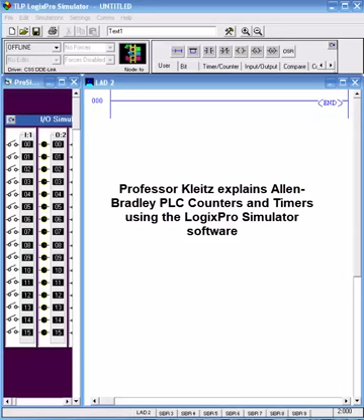Okay, let's talk about timers. I'll be running the simulator, not the actual RSLogix, but it'll give you the same effect. Under timer, we've got timer on, timer off, retentive timer, and so on. But you want to read about each one of these. The most basic would be the timer, the T-on.

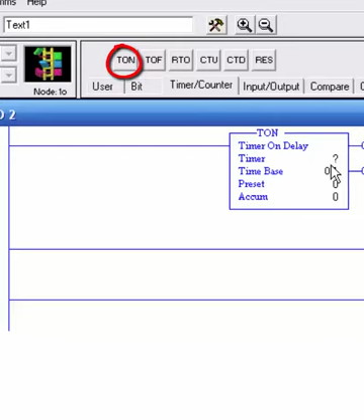So I'll add a few rungs here and grab the T-on, and I'll drop it here, which it always ends up appearing on the right hand side. Timers always start as T4, so I'll say T4:0. And then we pick a time base. This is going to be tenths of seconds. On the RSLogix, you have more choices: 1 second, tenths, hundredths, and thousandths, I think. Now the preset, let's just set this at, let's say 50. That'll be 50 tenths, which will be 5 seconds.

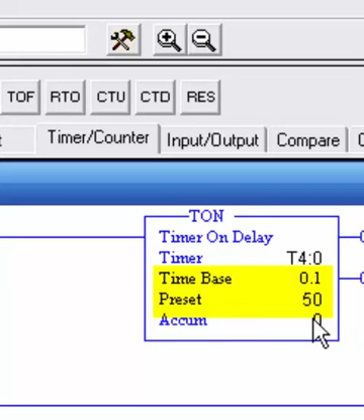And as this is timing, you'll see the accumulator counting up. And as soon as it hits 50, the done bit goes on. What we want to do is drag an XIC down here, and we'll use I:1/1, and this will be the timer enable. And when we throw this, this will enable the timer.

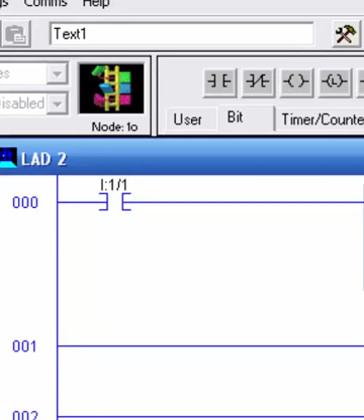As the timer is counting up in the accumulator, we may want to monitor several of the bits of the timer. So if you want to monitor a bit, you would just say T4:0 slash, let's look at the enable bit. And when this is activated, let's just turn on this output number 2 light.

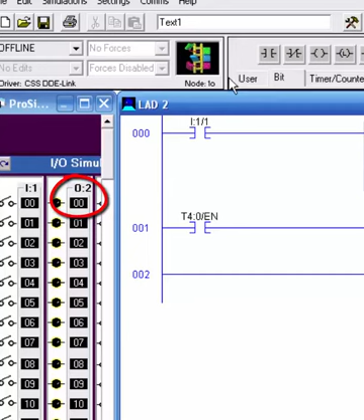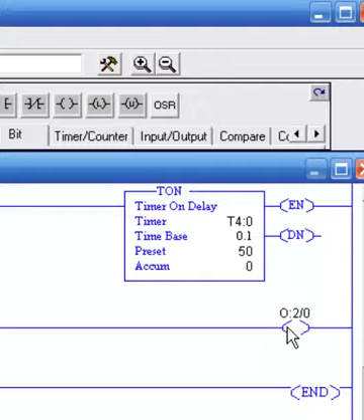So I'll grab an XI, or OTE, I mean. And of course, you're always going to put symbols and labels on these, but right now I'm just trying to get through this in a hurry. I'm sure you'll do what's right. Output colon... 2/0, and this will be the enable light, and that light will come on as long as this switch is closed and the timer is enabled.

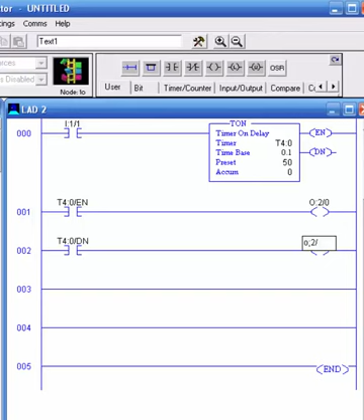So I'll add a few more rungs here, and you might want to monitor a few more lights. How about the done light? So you could do the same thing. Grab this down here, T4:0, T4:0 slash DN, and we can watch the done bit. And if I grab this and drop it down here, make this another one, output 2 slash 1. And let's just look at this much. I'll let you figure out the TT bit.

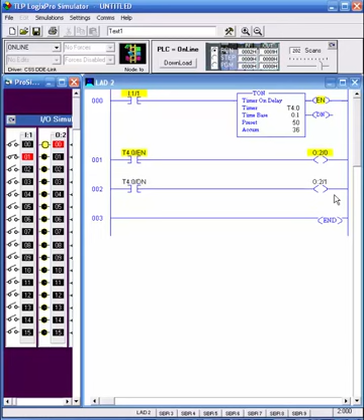And if I download this and run it, you'll get an idea on how this thing works. So when I close the switch, is this thing running? Oh, I closed the wrong switch. Let's open that, close this switch. It's enabled, the enable light's on. As soon as it's done, the done light will come on. And the done light came on.

So basically, this is what I want you to do, is to show me how the T-on, the T-off, and the T-retentive all work.

Okay, another timer application I want you to look at is an oscillator. You all know from digital logic, it's often required to have an oscillator that's at some given period or frequency. What I've got, this first timer, this is timer 1 and timer 0, but timer 1 is set up at, what's that, 10 seconds, and timer 0 is set up at 5 seconds. And to get this oscillator to start working, what we're going to do is oscillate back and forth between these timers. Now the first timer, T41, is driven by the done bit of T40.

And now when we first start out, this T40 is not done. And that's what I'm checking for. Are you not done? Well, it's not done. So this is true. This timer will start counting up to 100. As soon as it hits 100, this done bit comes on.

This done bit activates this XIO, or XIC. When this is executed, this one starts timing up. When this one counts up to 50, this done bit will be done. That's going to make this false, because here I'm saying, are you not done? When this is false, you may have discovered that the done bit, as soon as this goes false, the accumulator gets reset, the done bit shuts off. As soon as that done bit shuts off, that's going to make this false. That's going to turn this accumulator back to 0, shut this done bit off. When this done bit turns off, this will be true again, and the cycle repeats.

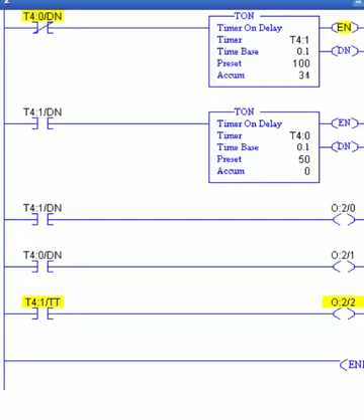So for one cycle, the length of time it took to go from here down to here and reset everybody, that's how long that was on. If you wanted to see that actually happening, you could go into step mode, time it just right, and single scan. Each time I press this once, this will count up - 3, 4, 5. I'd be here for quite a while, but you could shorten these up. Maybe I can get through this, but if I kept doing this, you could actually see this come on for one cycle. So tell me what that duty cycle is.

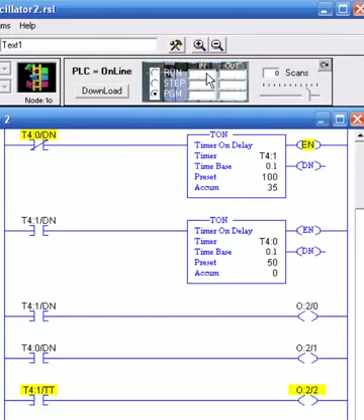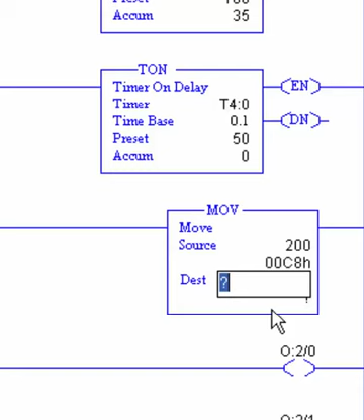Now another thing I'm going to ask you to do is speed control on this. You could actually load a different number into the preset. If I go into program mode and add a new rung down here, I could use a move statement, which is over here, and move some data into the preset. So the source would be some number - instead of saying 50, let's say I want to move the number 200 in here. And the destination is T4:0.PRE. When I say dot PRE, I mean a whole 16-bit word. 200 is going to be moved into that 16-bit word when this line gets executed.

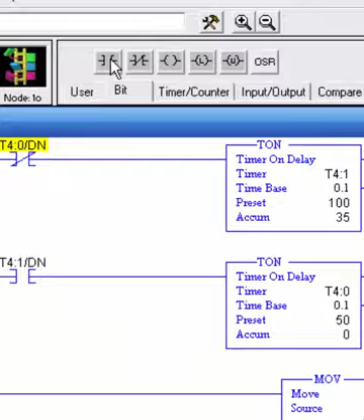But I don't want this executed every time - maybe only if somebody throws a switch or pushes a push button. So I could take this and put it down here, calling this input:1/0, and that would be this. Let me make that a push button. When I push that button, I'm going to load the number 200 into this.

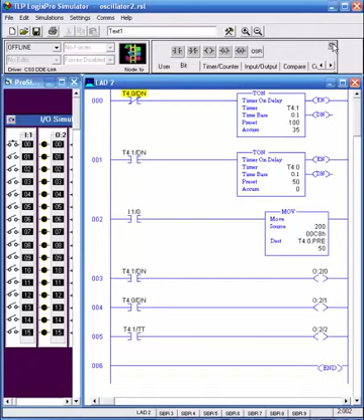So let's give this one a shot. Download, run. The thing's oscillating, and the preset on this is 50, which is really 5 seconds. If I push the push button, I'm going to dump a 200 in there instead. As soon as it's done counting, I'm going to press that button - let it get up to 50, and it's through. Now I'm going to press the button right now. As soon as I did that, the 200 got loaded in there. Now it's going to have a much different duty cycle.

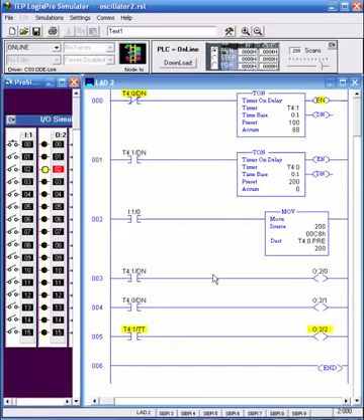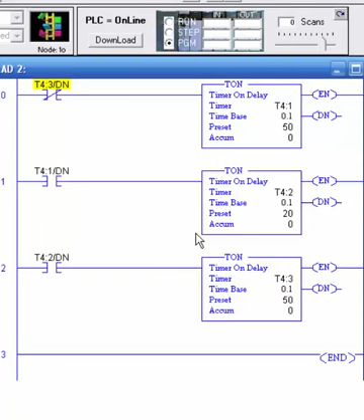Some of the traffic light applications you're going to be asked to do will require lining up several timers. Three would be good for just one north-south direction, but when you get to the east-west direction, you'll have several other considerations to deal with.

Okay, the last topic before I let you fly with timers and counters is counters. Let's grab a counter, CTU, which is a counter up. These are going to be C5s - that defaulted without me even clicking on it, that's good. And the preset value, let's put an 8 in there, for example. What this means is when this counts up to 8, it'll be done.

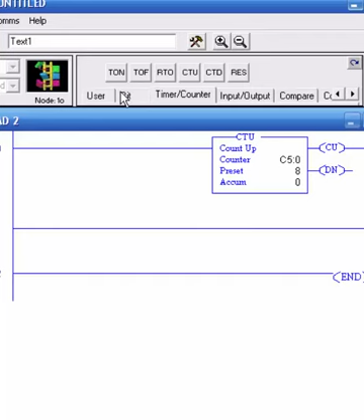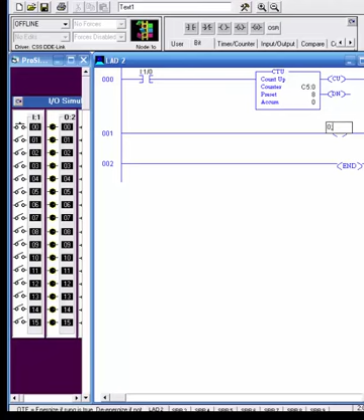To count, I'll grab a bit and make this a push button, which is input:1/0, this push button right here. Every time I push this, it counts up. We could also monitor the done bit if you wanted to - I could turn on some light at output:2/0, and monitor that bit. To specify the bits, you say counter5:0/DN, so I'll be looking at that done bit.

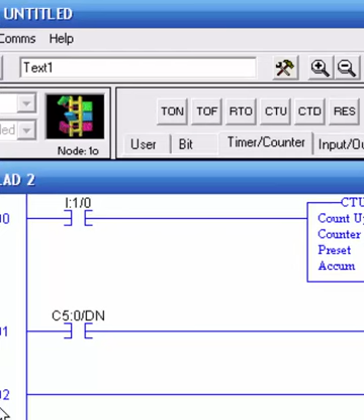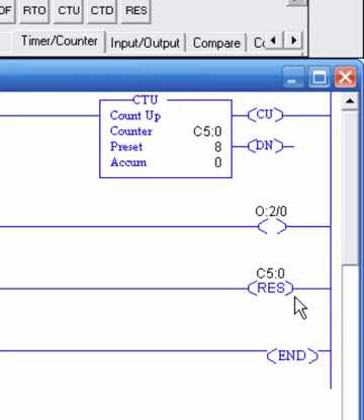Now once the counter counts up to 8, it doesn't recycle, so we need a reset, and they have a reset command right here. If I add a new rung and drop that reset command down here, I'll reset counter5 - you just say counter5:0, you don't specify a bit number, just counter5. I want to reset it when I push this push button, so this will be a different push button. I'll say input:1/1, which is the second one, and change that to a push button.

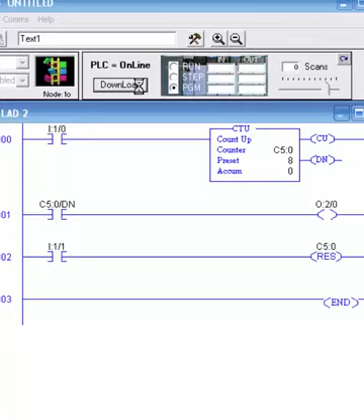So let's give this one a try. If I download it and run it and start, every time I push this button, watch the accumulator - went to 1, 2, 3, 4, 5, 6, 7, 8. The done bit came on, and I could keep counting - it'll keep on rolling past that. There are other bits associated with the CTU.

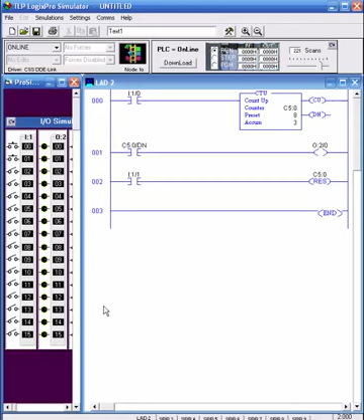If you highlight that and press F1, the help screen will pop up and tell you about the other bits associated with counters. Now to reset it, I want to push 1/1, which is this button. Watch, I'm going to press it - ready? 1, 2, push. I pushed it and it reset everything, and now I can start counting again if I wanted to. Fun, isn't it? Okay, so start working on those counter timers.